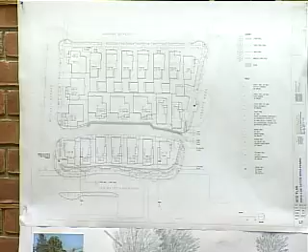It's the entire block encompassed by Los Gatos Boulevard, Mitchell Avenue, George Street, and Roberts Road. The former Honda dealership occupied this site and a property across the street on the corner of Shannon and Los Gatos Boulevard. The property across the street is not part of this application; it's owned by a separate party and doesn't currently have a proposal on the site. The Honda dealer relocated out of town in 2009, and the service operation continued on the site into fall of 2010.

The CDAC, the Conceptual Development Advisory Committee, considered a higher density project on the site in December of 2009. Based on that input, the applicant returned to the CDAC in March of 2010 with a 24-unit proposal, and then developed the current plan being considered this evening. The number of units has dropped to 22.

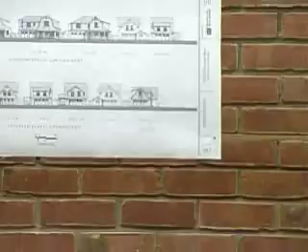The site was formerly listed on the town's housing sites inventory and was a potential site for a higher density overlay zone. It was removed when we had an application proposed for this site, as was the site on the Swanson Ford property. The only reason we took it off is because we had a valid development proposal, not that it wasn't considered valid for affordable housing overlay.

The Planning Commission considered this project on September 14th. Initially, the Commission had a motion to approve that failed on a 3-3 split vote. So the Commission decided to forward the application to the Council for consideration with their comments.

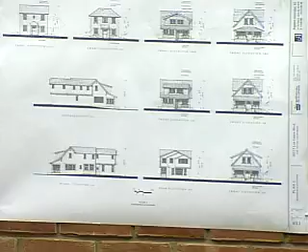The proposal is to demolish the existing auto dealership and construct 22 new single-family residences. 2 BMP units are required as part of the project.

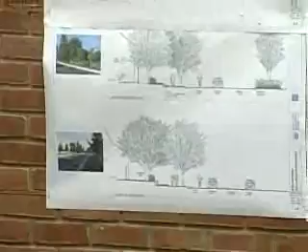The applicant is proposing some site improvements that are not actually required elements, but they've incorporated into the project to beautify the area, including bulb outs at the corners. They're fairly large bulb outs on the corners of Mitchell and George, and on the corner of Roberts and George, which will help slow down traffic and do a little traffic calming, giving some additional area for planting and sidewalks. There's also smaller bulb outs on the opposite corners.

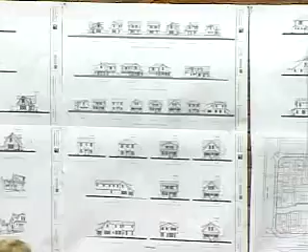The center median in Los Gatos Boulevard will be reconstructed and fully landscaped. And on Mitchell Avenue, in addition to the new sidewalk that'll go around the perimeter of the project, it's also going to be extended along the south side of Mitchell, so there'll be a sidewalk on both sides for the length of the property.

2 BMP units are required by code. The applicant is proposing 1 on-site, which would be a moderate income unit, and 1 off-site, which would be a low income unit. The unit on-site is a 4-bedroom, 3-bath, 2,300 square foot unit, which would be the largest unit in the BMP inventory. The off-site unit is proposed to be sold to a low-income recipient or family, which would be the first low-income for-sale BMP unit in the town's inventory.

The Planning Commission had some discussion on this issue. They decided ultimately - we did have some planning commissioners recommend that both BMP units be on site. So that's something for the council to deliberate this evening, and I think the applicant will be speaking to that as well.

A traffic study was not required for this project, but the applicant completed one voluntarily. We did look at cumulative impact analysis as part of that, and at Planning Commission, a question was asked whether the Safeway was factored in because it wasn't yet open and now is. Yes, Safeway was factored in along with all the pending and proposed projects in the town. The determination from the traffic analysis was that we won't have any impact to surrounding intersections. A residential use is our lowest traffic generator.

Relative to school impact, the project would generate between 10 to 15 new students. At the Planning Commission meeting, the applicant offered a $150,000 contribution to the school district, and this is in addition to the school impact fees that would be assessed for the proposal.

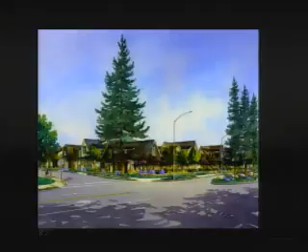When you read the boulevard plan, one of the things it says is that a new project should look and feel like the town. This project is going to look and feel like the town. It has that character. In addition, as staff talked about, we're planning some significant landscape improvements.

You've got a median here, and heavy landscaping along the boulevard, including a low stone wall, which is a classic detail that you see throughout town and one that's very memorable. We're also preserving some of the significant trees, including this large redwood tree.

The architecture is also very unique. There's 18 different elevations out of 22 homes, so each home will be different, and that's one of the policy goals of the boulevard plan—that there not be standard architecture, and this one won't be. Each home is going to be different. Lastly, the quality of the materials are also going to be of the highest caliber. On this particular home, there's cedar shingles, which I think will add to the character and ambiance of the street.

All right, let me go to the site plan. Right there, back. All right. Well, looking at old aerials, there was 4 homes along here before the dealership demolished those homes and replaced them with an expansion of the dealership. You can see the lot lines here. There's a lot here, there's a lot here, there's one here, and there's one off the page over here. So there's 4 houses across the street. And so we've got 4 buildings facing those 4 buildings, and it's the historic pattern that was there.

And that's where we abut single-family homes, and that's why we designed it that way. So again, as I said in my presentation, front door to front door, porch to porch, so that it was consistent with the character. Relative to other sides of the project, each one is different, and that was one of the real challenges with this particular property, because there were 4 sides, and they all had a front door, so to speak, and were very prominent, so each one we considered separately.

Along Los Gatos Boulevard, you've got a big setback here, and this is a busy street. It wouldn't be the most desirable place to live on the site, and it's not the place you'd put your biggest homes. Because of that, we've put a little higher density along this edge to match the character that it's adjacent to.

Over here, where we're further away from the boulevard and across from duplexes and a school, we've got a very similar streetscape to what you saw at Bluebird Lane. You've got deep porches and recessed garages, which I think is a really nice feature, because you're not going to look at garage doors. You're going to look at front doors and porches, with the garages recessed. I think that is really important.

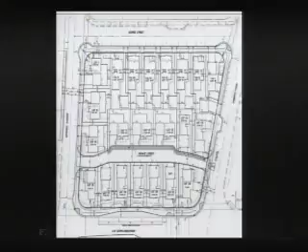As you come along this edge, we're across the street from an automobile repair, and to the degree we could, we sided onto that. So again, we put smaller houses here. This is one of our smallest houses, and so is this, and so is this. We sized the houses appropriately to where the density was, what it was adjacent to, and where it was most compatible. That's how we came up with the plan, along with other features in the neighborhood like walkability and so forth.

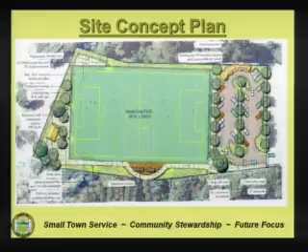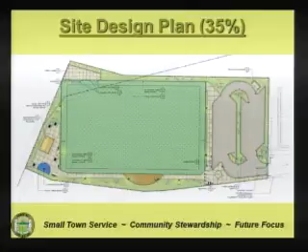This is another rendering of the park. This is a colorized version of our 35% design plan. And in this particular picture, you can see the tot boulder play area that was added to the picnic area, and a better idea of the scale of the restroom, concession, and storage building.

That brings me to the recommendations. There are 3 recommendations for the report this evening: to approve the Creekside Sports Park Master Plan, to direct staff to explore options for providing pedestrian sidewalk access to the sports park from Lark Avenue to the sports park entrance on University Avenue, and to direct staff to explore alternative alignments for a pedestrian bridge connection between the Los Gatos Creek Trail and the Creekside Sports Park.

I'd like to conclude the presentation with an overview of the next steps pending the decision this evening. We would like to move forward with a groundbreaking ceremony. We have tentatively scheduled that for October 18th, 2011.

Council approval of plans and specifications is planned for January 17th, 2012. The selection and approval of a contractor would occur in March of 2012, and grand opening of the facility in fall of 2012. That concludes my presentation. I'd be happy to answer any questions.

Thank you very much. Questions of staff? Let's start with Ms. McNutt. Thank you. I have 2 or 3 questions.

On the tot lot, which I don't actually remember from our discussion previously, can you describe what that would consist of? Sure. The tot lot would be one medium-sized climbing boulder made for a play structure with pour-in-place rubberized surface around the boulder area. So when you said small, you actually meant small? Small.